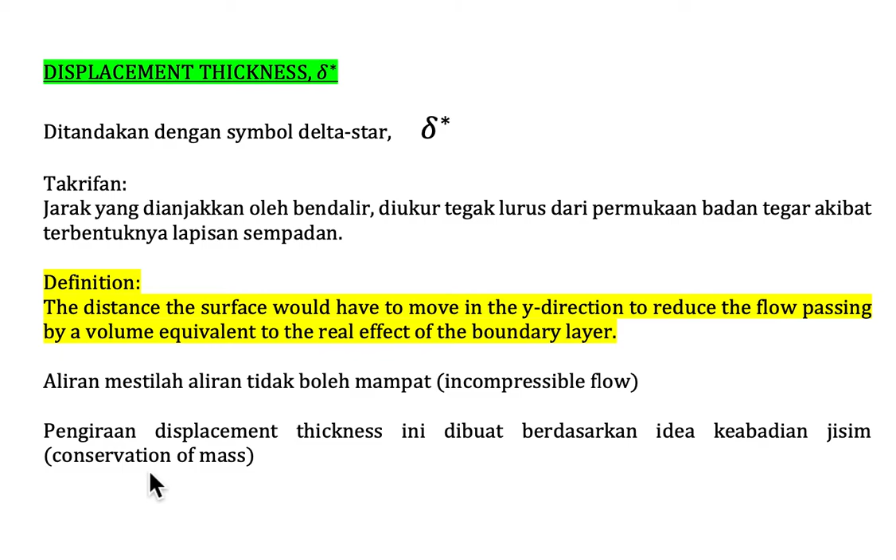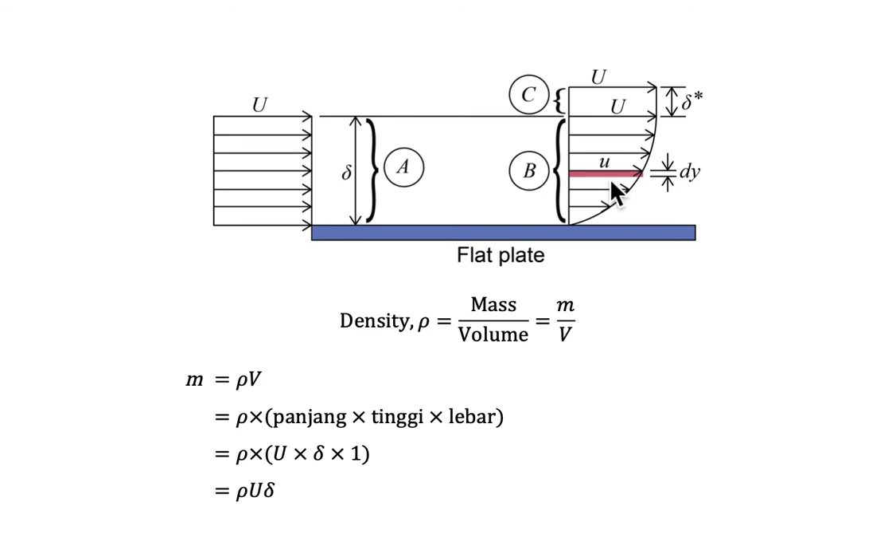According to this diagram, the total mass from area A must be equal to the total mass of B and C. So we write mass A equals mass B plus mass C. Mass A and mass C are easy to calculate because the area is rectangular. Mass A is rho, capital U and delta, and mass C is rho, U and delta star. We have a little problem defining the mass in area B.

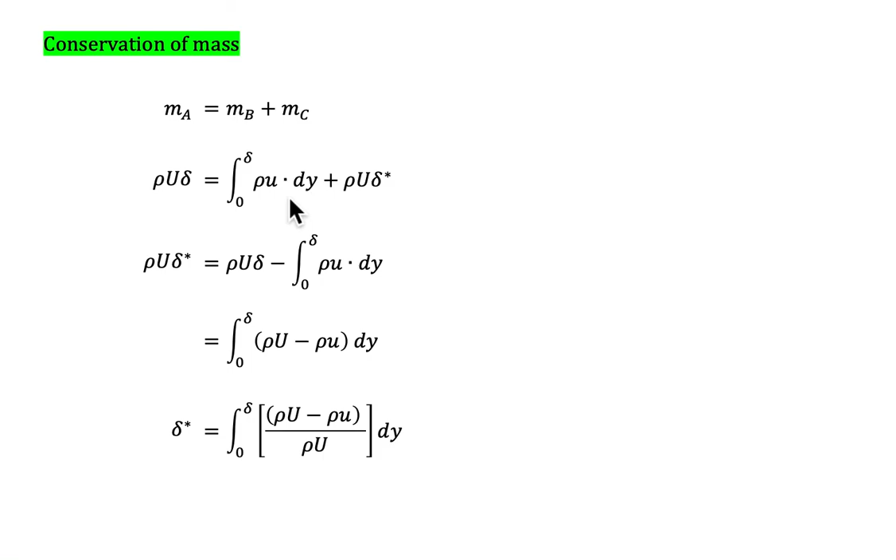The answer is that the integral from 0 to delta of rho small u dy is the total mass of area B. If we look at this area, the local velocity keeps increasing. So we imagine a colored area here. Because it is very small, we can treat it as rectangular. Its length is small u, the local velocity, and its thickness is very small, dy. So the mass for the colored area is rho, u, and dy.

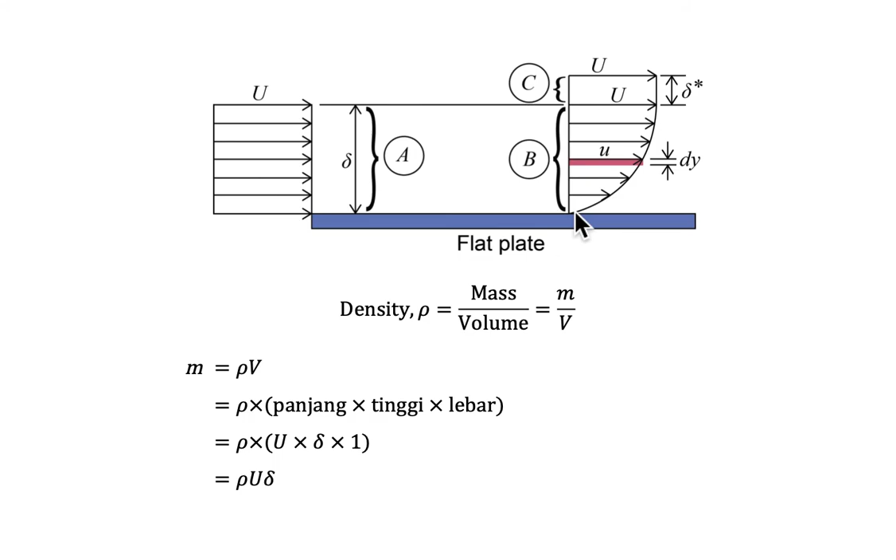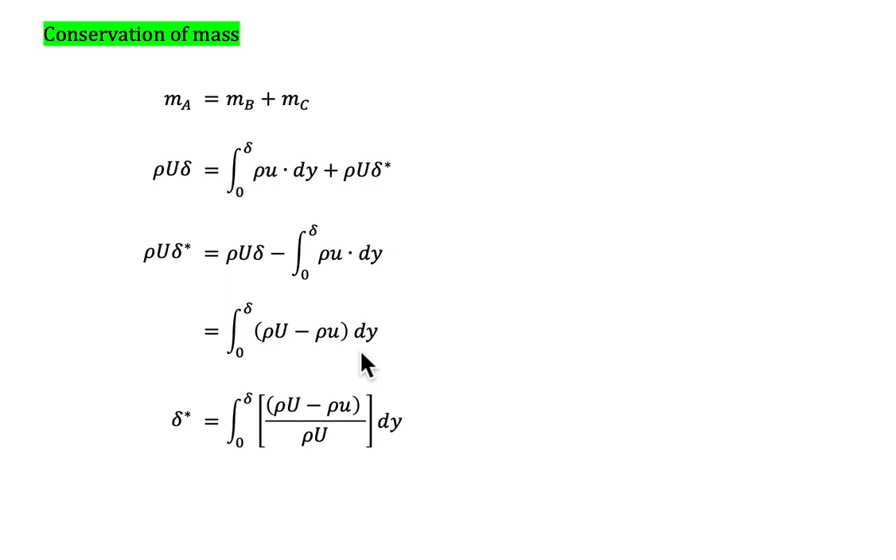To find the total mass in this curved area, we integrate this value. Rho u dy is only the mass for the colored area; integrating from 0 to delta gives the total mass for area B. After that, because we want to define delta star, we rearrange this equation, then simplify it, and finally this is the final term of delta star.

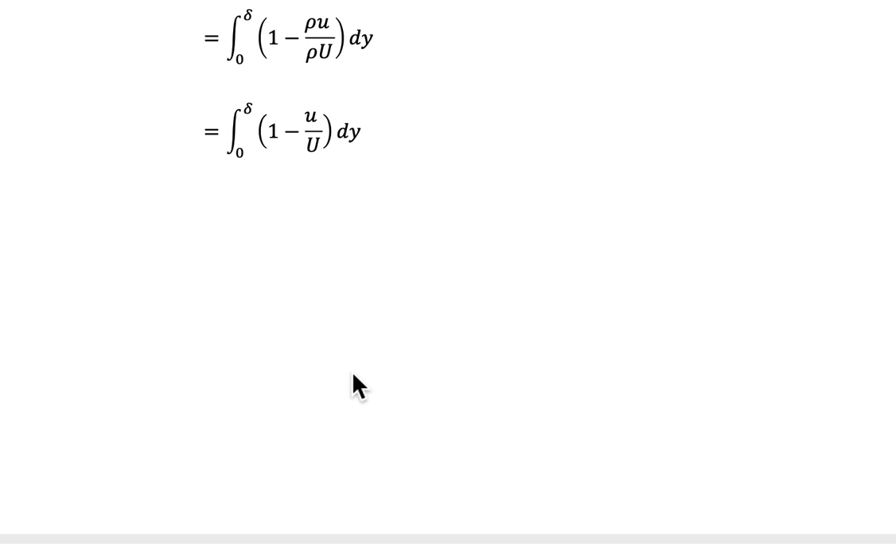As a conclusion, the equation for displacement thickness is delta star equals the integral from 0 to delta of (1 minus u over U) dy, where delta star is the displacement thickness, delta is the boundary layer thickness, small u is the local velocity, and capital U is the free stream velocity. Please be careful to differentiate small u and capital U so that examiners will understand your writing.